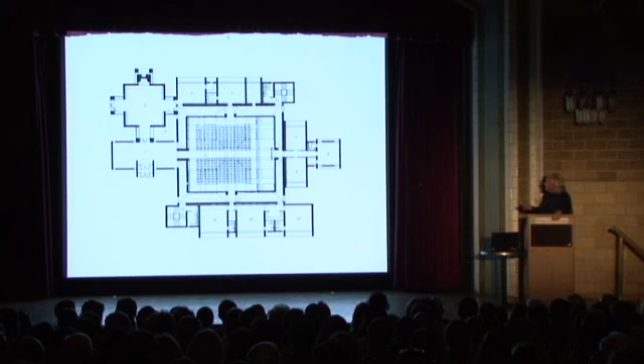But I think also in Rochester, that inside is an outside. It's all done in concrete block, and the underside is concrete, and in a certain sense you feel you're outside. And certainly the way the light comes down, it's like coming down from a cloud. Out of these four gigantic cubic monitors, this glareless light washes down in an amazing way.

Certainly in the Dominican Mother House, there's an exploration of what is the 'in' of this project. By the way, I was involved with Lars Muller in sponsoring the publication of this book - it's an enormously wonderful book. It's only about this project, and it's about all the number of drawings that Kahn went through to reach the project, which was never built.

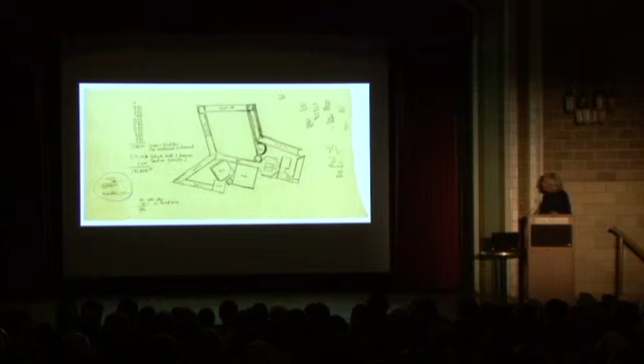You can see here, even in the beginning, the sense of the space being central, the sense of the void space being the central aim. But even here, the calculations of the areas, and then there's the budget, $3.4 million. Maybe that's why it never got built.

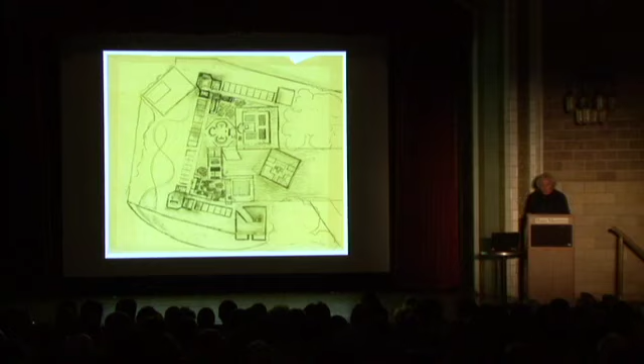There's more than 900 drawings, and the book can't record all of them, but there's more than 900 drawings in the effort to reach this project. I think drawing is a form of thought. This is something we're losing today - our young people don't draw. They turn the computer on and it draws for them; it has a setup so certain lines come out, and you don't copy anything, you don't retrace things, you just hit the copy button and it gets copied. So when you look at these drawings in this book, you understand the retracing, the rethinking, the meditating on the process of design - that's something I think we need to look at as something that gets lost in the current tendency.

I say that as a teacher of architecture at Columbia. There are many versions of this project, wonderful versions. I think it's one of the seminal projects, and yet it wasn't built.

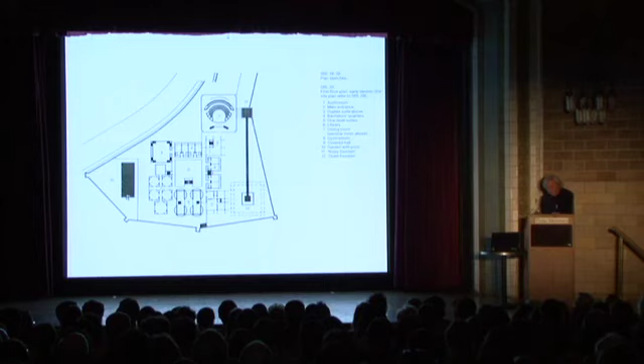Again, the project doesn't bring itself to a conclusion very rapidly - there are many, many different schemes. Here you have a scheme, I think this is 1963, and you see the water that he thought was so important, but it's out here - it's a trough on the outside. It's called the noisy fountain, number 11, and the quiet fountain, number 12. At San Diego we need water, we need precipitation, that respect for water is very important. But it's not central, and that's not correct yet.

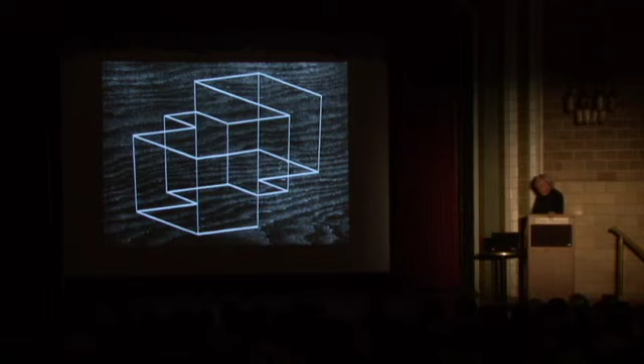In our work, I want to find the connection to these explorations of 'in,' and I trace it to the thinking we did for the Porta Vittoria project in 1986, a triennale exhibition project where we wanted to reject the current tendency to make typology and morphology the only way to think about how to make a new city plan. This was 1986, Leon Krier, the ghost of Aldo Rossi, and we said, no, we want to look at the city in section. Then I said there are four types of architecture: under the ground, in the ground, on the ground, and over the ground.

Those are the primary relations. So you have a kind of between, under, in, on, over, and a within, under, in, on, over, and a complex relation where you have an 'in.' Each one has an in.

These were a kind of prepositional chart on which we did our Porta Vittoria project, which later shows up in the larger urban works in China, and especially in the Fukuoka, in the Makuhari project in Japan, which I'm not going to show tonight because I have to focus this talk on smaller pieces so I can make the point.

So I thought, where's the first place I could see this in our work? I saw it not in my father's house, a wooden house in Manchester, Washington, near Seattle, that my 93-and-a-half-year-old father still lives in, which he built half of. I don't publish that because it wasn't yet architecture. But I think this pool house and sculpture studio, now torn down, is where it started.

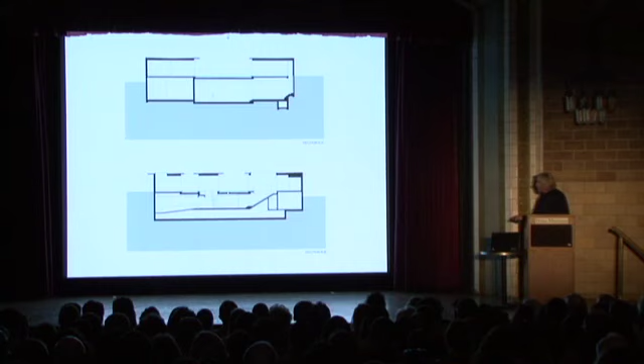I have this little video which I think explains this better than I can, because you can see the movement of the light.

One of the reasons I like this project is underneath of the water is the foundation of the art, his desire for art. So the sense of music and poetry and painting and sculpture is a foundation that's merging with the idea of domestic life. That's a kind of mini utopia.

There's two things: there's the idea that drives the design, which was that musical diagram and the notion of music, and the sheet of water and the light.

But the most important thing is the body moving through space and the actual feeling that you get. For me, architecture really has to be experienced. You have to walk through it. You have to sense the sound.

Here we have an acoustic. We have a reverberation time in this gallery of about 1.6 seconds, which is like an old church. That's because of the stone floor, a honed stone floor, the hard surfaces and the organization of the proportions. The first moment of entry really is ascending this half stair.

Here you're in the center of the composition. You're in the entrance pavilion, the middle of the three, but your view is to the outside. So the excitement really is: you're inside, but the focus is the outside. That outside unifies these three pieces in the feeling of the water, the sheet of water going through.

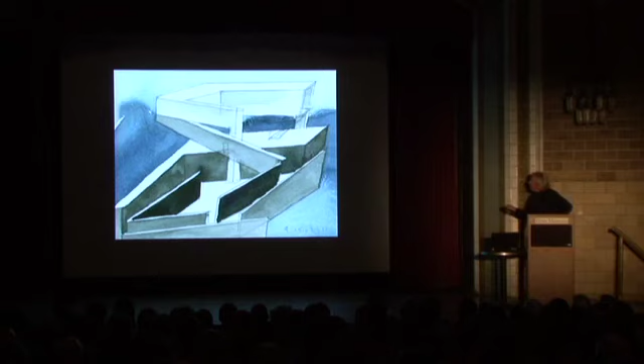The beginning courtyard, all below, would be warped spaces in parallel perspective. As you move up through the building, you go out, and then turn into a gallery which is hovering like a lantern, shining back at the city in the distance, the city of Nanjing. So you can see the idea of these courts.

They're all in bamboo-formed concrete, a material we found on the site—very large bamboo. So we're connecting again to that condition of the site. There you see the scale of the bamboo. You have the sense of scale when you walk up to the building because you see the imperfections of the bamboo and how that begins to be a texture. That's just a formwork lining of the concrete.

As you gradually move up, the distant view is carried. There's the main entrance—moving up through, this was the opening day, some of the exhibits there. Moving up through, then through the upper gallery, and finally out into the distant view of the city of Nanjing, which was also a walled city, the seat of one of the dynasties. Nanjing is a very important city that way. So there's a sense of the urban, but also a sense of this condition of being in, and being in this kind of parallel perspective space.

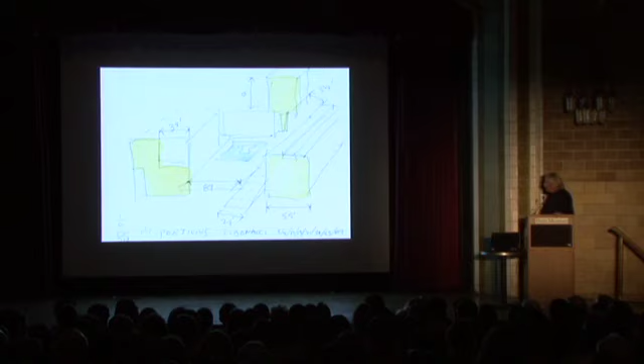3, 5, 8, 13, 21, 34, 55, 89. That's 55, this is 89, that's 34, that's 55, that's 34. That was almost done intuitively. And the notion of seeing in — you see the performance from the central quadrangle, you see down into the performance studio, so there's a sense of being part of what's going on inside these rehearsal and activity rooms.

In the music building, you have the individual suspended over the collective. This was one of the main pieces of the program, the orchestral practice hall, which has to hold like 150. Then you have the individual practice rooms — we made them suspended from a concrete frame above, on steel rods, as wooden boxes. So they have this feeling almost of a resonant chamber. There's the big orchestral practice hall, and then the resonant chambers suspended on these steel rods, acoustically separated from each other.

They'll have a life — you'll be able to see those through the glass walls on either side, in the quadrangle and outside the building, and also at night, because people will be practicing there at night. So there'll be this life of this sort of entrance building. I'm very happy to say it's finally under construction after 7 years and, let's say, more than 150 presentations.

This building also went through some 70 presentations in Glasgow — very difficult. It's the Glasgow School of Art, which just opened on the 9th of April. This is probably the most important building in the UK of 1909, by Mackintosh, the Glasgow School of Art.

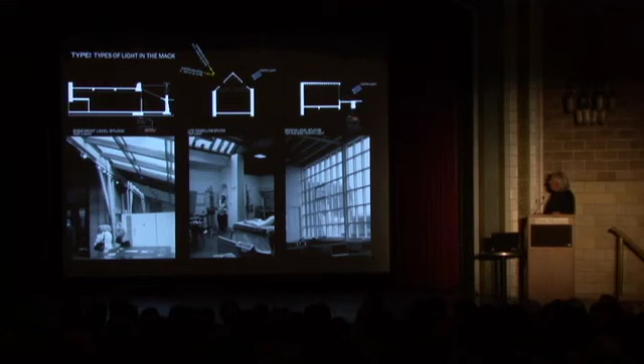You can see there an aerial view, showing the relation of the Mackintosh building and the new building, central to Glasgow. Our beginning was to do an analysis — this was part of the competition process — of all the different kinds of light that Mackintosh employed. There were really a lot. The different studios, it's such a vocabulary, an amazing vocabulary of different kinds of light. It was an exciting thing to begin with. It's such a rich building, it's amazing.

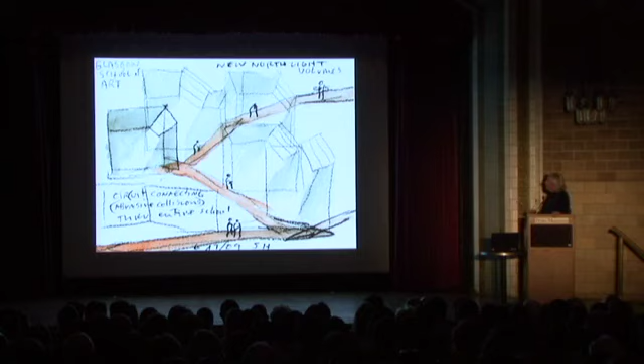After our analysis, we did a series of concept drawings where we thought the whole building could be based on driven voids of light, and the collision of those with great studio spaces that are 15 meters square, organized around what we call the abrasive collisions passage — a kind of meandering route through the building that creates relationships between students in different departments. Intentional confrontations and bringing together of this school.

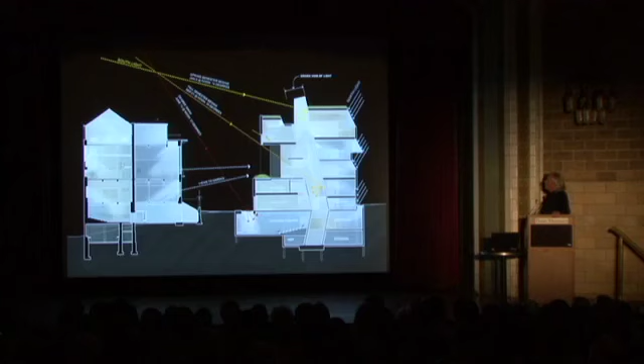There you see the section and the idea of the reversal of the structural relationship. The building we are making is in what I call complementary contrast: Mackintosh's building is thick skin — stone and bearing — thin bones of steel and wood. Our building is thick bones, all concrete structure, and very thin skin, recycled double glass in a matte finish. So they're in this complementary, opposite relation to each other. Here's just a very short piece of the construction, showing this idea of the driven voids.

Uh-oh. We have digital failure.

I always love the way that when you come in, you're drawn to the light already. The natural light is already part of the experience because there's a certain condition of the light dropping in this large stairwell that just brings you up.

And that was the beginning point for us, just to analyze all the natural light in the Mackintosh building and then convert that into another geometry. It's a cubist version of the Mackintosh.

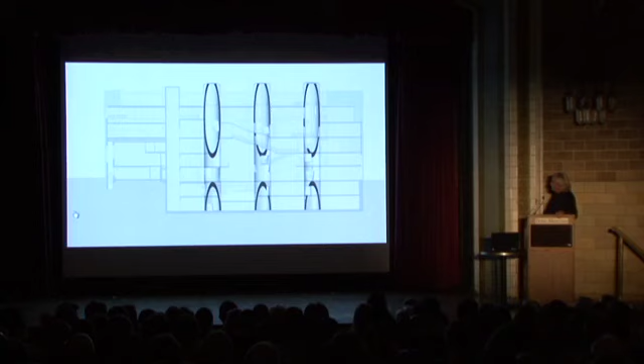Okay, let's see if we can skip this. Basically, that's the sort of heart of the building and the heart of the idea. And I think when I talk about explorations, here we're talking about the structure, the light, the condition of the air, because it's all naturally ventilated.

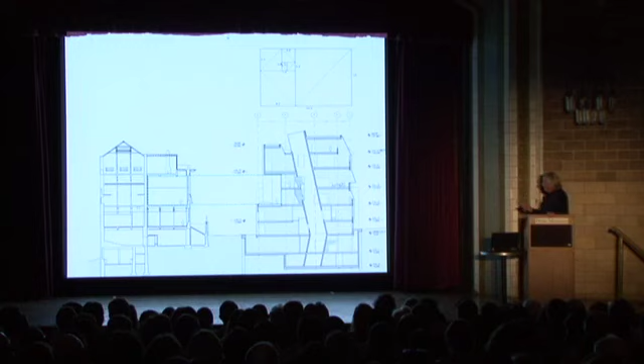This building is a super green building. And the condition of the movement, so marking of the time of the people moving through the building. And again, all the proportions according to golden section relationships, both in the Mackintosh, which we discovered, and you can find them very easily, and in our building.

And the relation of an existing building that we saved, the assembly building, that was also a fight. We wanted to save this corner urban building and just float our building over it. It was very easy structurally. They thought that this should be torn down, and we said, no, that's really part of the texture of the city. And it was the student drinking place, and they have it as a bar now, and that's what it was before. So it's also their escape from the rest of the school, and I think they love it, by the way.

And this is the complementary contrast in materials. You see the Mackintosh in that wonderful steel, complicated steel work, and the great yellow-green stone, and our recycled glass. So the relationship between the old and the new.

And there you see the assembly building saved, and that's the drinking place of the students, and these are the great studios and classrooms. And that would be another lecture.

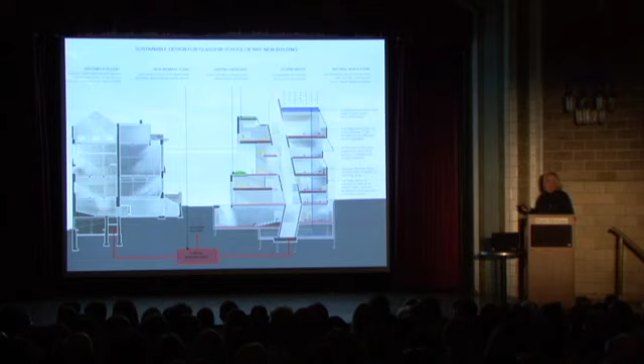I really believe firmly that this is a kind of emergency moment in architecture, that every building needs to be super, super green, and we make all of our projects that way. Even that house that I showed you in Korea is totally geothermally heated and cooled, which took me a lot of arguing. So every single one of our projects takes the highest level of energy responsibility that we can.

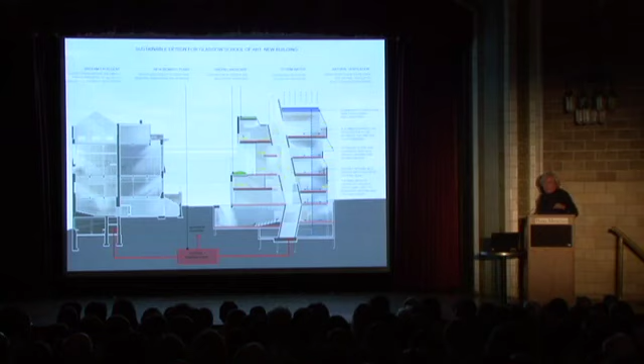But I don't think that's architecture. Architecture is something more than that.

This building just opened on the 9th of April, and I really hope if you get to Glasgow, you have a chance to see it.

The press has absolutely run me over the coals. It's amazing, and I won't even go into it, but I'm very proud of the building, and I think the students speak for it better than the press. And the building is basically a black and white building.

In a Mackintosh building, there are many colored glass elements all over, sprinkled all over. So we decided at the entrance we wanted to make complementary contrast to the Mackintosh, and we decided to do this with the artist Martin Boyce, who's a Turner Prize winner and a Glasgow graduate. He was really hesitant at the beginning. He said, 'Yeah, but Steven, I don't work in colored glass.' So I convinced him, and he did a great project.

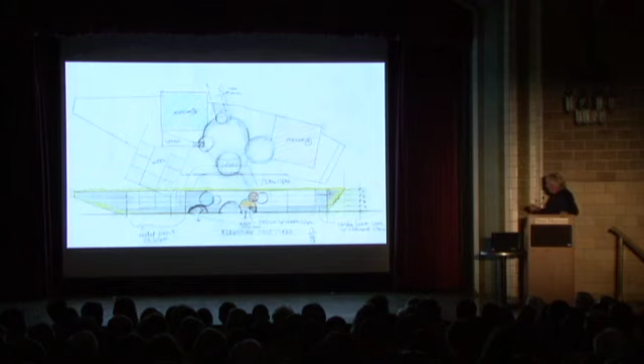In the arrival hall, there's 2 museums, and there's the hotel, and there's the first kind of drawings, and then this notion of a very large space which utilizes these intersecting circulatory possibilities to bring you up to a tunnel to the other pavilions and to a museum. So this is the main entrance.

In this building, I'm exploring this notion of spherical spaces intersecting. I got very excited about that as a possible spatial exploration that becomes tenuous and asks questions about what is inside, where's the center, and how the body moves through these spaces.